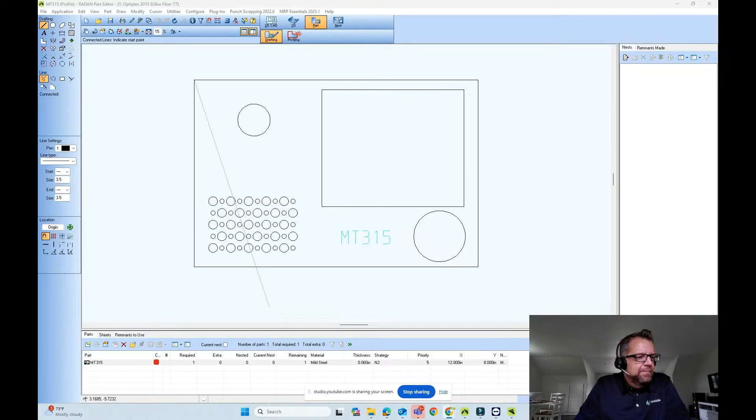I'm going to switch here to profiling, then I'm going to click on settings, and that should pop up this box here. What I want to draw our attention to first is that we're going to be looking at mild steel 060 with nitrogen.

Now this is important because this drills down into the manufacturing database where all this stuff is saved. Everything in this window, all the edits and changes that we make, we can come over here to settings and save that to our manufacturing database for this material. Now that's important because when we click on the next thing, I'll show you how you'll notice if that's incorrect, if you're used to working with strategies.

Now some posts, if you don't - I'm on a Mazak today. So if you have an older machine or older post that may not need the use of strategies, it may be a little bit different. All you may have is just mild steel, or material type and thickness.

If I was to change this, and I'm going to remove my notification of the gas, right? I'm going to select none. I'll click OK and OK again. Now in my rules and styles, notice my page changes quite a bit.

So if you come into this and edit some stuff and you're like, wow, this looks weird, that would be probably your first indication that, okay, let's go back and look. Yep, I don't have a strategy. If you're using strategies, keep that in mind as well.

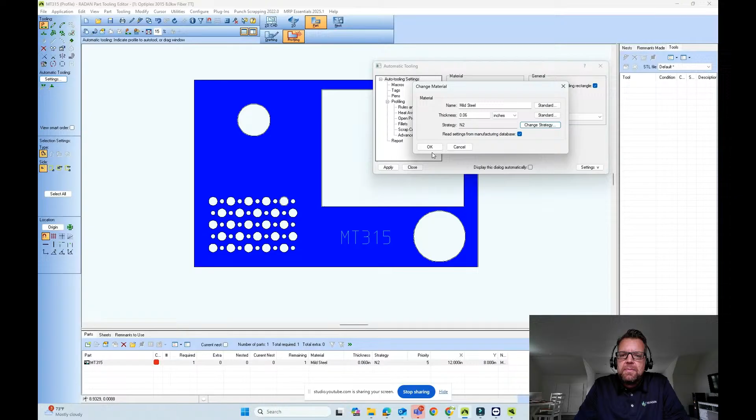So we're going to switch back to nitrogen, that's our default for this material. And then we're going to jump into rules and styles. This is like a hyperlink - when you click on edit, it jumps you to the page where the rules and styles are meant to be controlled, and we jump to small profiles because that's what it was selected for.

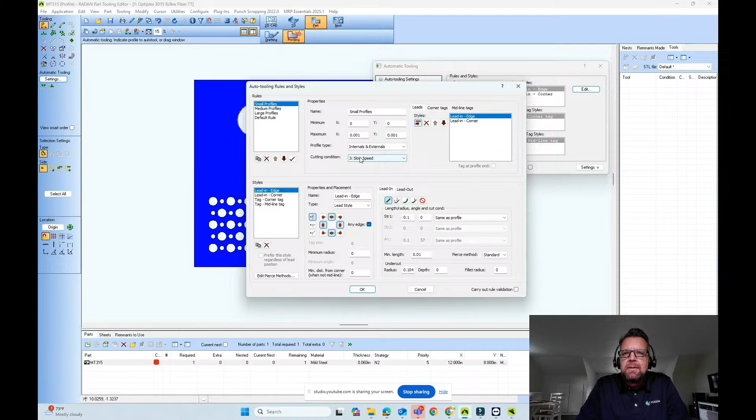Once you're in this, you can maneuver around and work on any of the rules or styles that you have. This, like I mentioned, is straight out of the Mazak handbook. If we installed a post, this is going to look exactly like how it would look for you. But I'm going to go ahead and just apply.

Okay, so we've got some tooling here in the background. If we zoom in on all of our holes, they're all in the same direction, all approximately the same length. Now the reason why I wanted to do that first is because when Mazak sets this up, they set it up so that everything is just done with large - basically zero to everything is done with the high speed, fast cutting.

We can control that by examining the features that you may have on your part. So we're going to do that today. We're going to say things up to quarter inch, I want to be done with my slow condition. So here's the conditions that you can choose.

If you aren't familiar with what conditions do, conditions are a way that we can control the machine. If there are different cutting conditions that reside on the controller, we can call them up and say this particular feature I want to do fast, this one I want to do slow, maybe some etching, maybe other options. All are controlled, in our case, by feature size.

Let's say my medium, I want to go up to 1/2 inch. Notice I'm not entering a bottom value. The reason is because this list works from top to bottom, so it's examining all the features on my part up to quarter inch. If they are a quarter or less, they're going to get my slow speed condition.

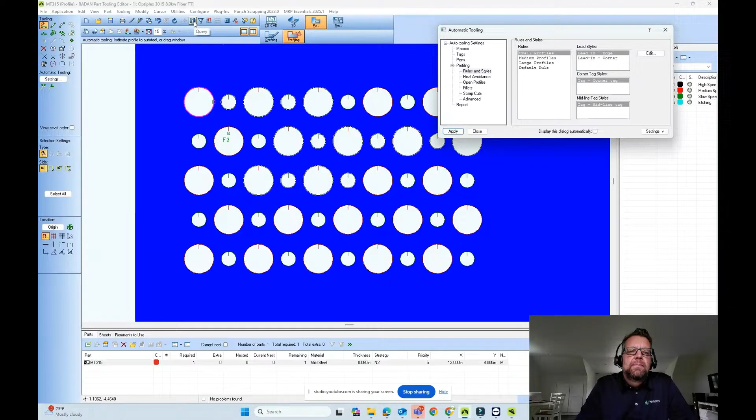Knowing that, if we come in here and say, okay, maybe if we go really small, you have a 16th, so now we're going to get that if it fits. Both of these should be a 0.06. If I measure that again, we'll go to the small one this time. We got 0.06. We'll go to the big one, 0.06. So if it has the room to make it fit, you'll get your desired length. If it's too large and that safety mechanism pulls in, you're just going to get what will fit, coming back to that center point.

So if we switch to double straight, this works like a countdown. I'll keep my tiny little lead-in as my approach coming up to my part, and then maybe we'll have another, maybe a little longer lead-in coming to it. I'm also going to have that come in at an angle just so we can see the difference.

The last thing is I'm going to have it be a different condition. In here we're cutting with condition, our fast and our slow and our medium condition. Here I'm going to just push everything to be high just so we can see what will happen. This is probably not what you'd do in real life, but just to see the different colors.

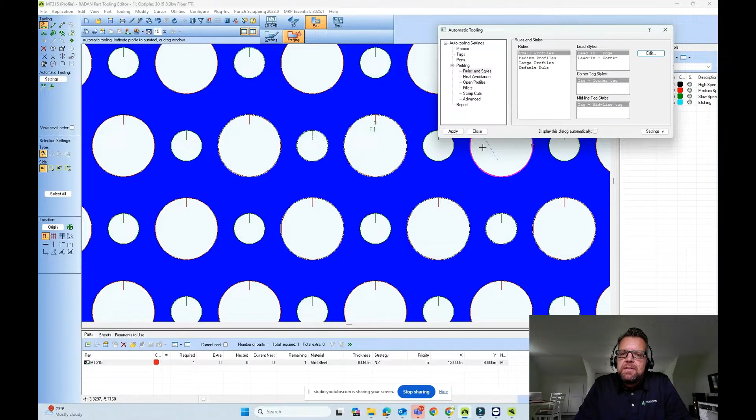Now if we zoom in even a little bit closer, we'll notice that we've got it piercing, coming in at an angle, changing to condition 3. The whole reason for lead-ins is to establish a good cut prior to it getting to the actual feature we want cut. This gives us a little bit of extra length, whatever condition we chose, into the part itself.

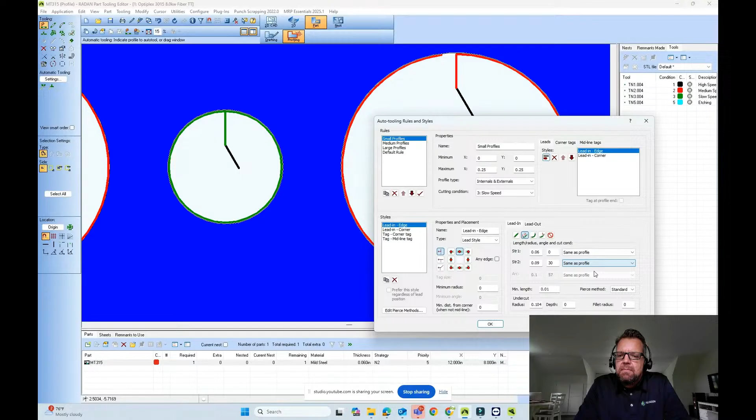We'll edit that once more, and maybe this time we'll just make it all the same. So we should see greens and reds and solids. Hopefully that makes sense to you guys.

Now, I didn't explain what's happening here as far as the degrees that well, but when we switch to arcs, this column now changes from angle to degrees. So with an arc, we've got a 0.1 lead-in coming in at 57 degrees. We'll apply this and see what we actually get.

So it didn't fit on this one, for maybe a couple of reasons. Maybe our lead-in length is too long, or maybe our angle or our degrees aren't enough. We can only come back to 180, so we can make a semicircle.

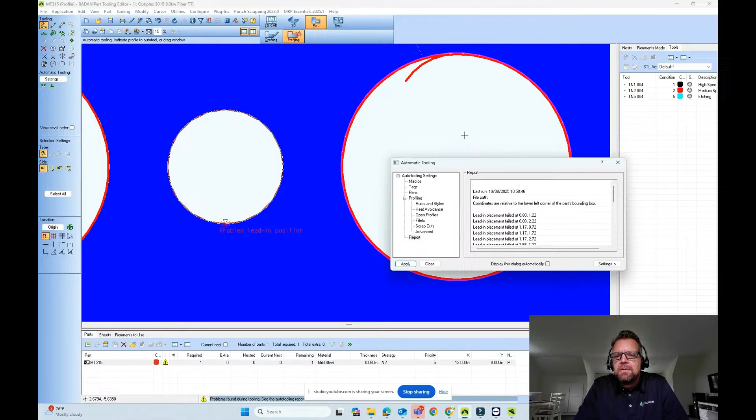We'll edit this again, we'll come back to 180. I think we should have enough room at 0.1, should be able to fit inside this completely. So there, we can only do a 180 all the way back. So there again, we didn't get it here. I think it's because the size is too big for our angle return.

So let's go, we're gonna go 30. I don't think that's true. I think it's this: our arc is too large for our feature size, because arc would be a 0.2, and our hole isn't 0.2 big. I think it's a 3/16 hole.

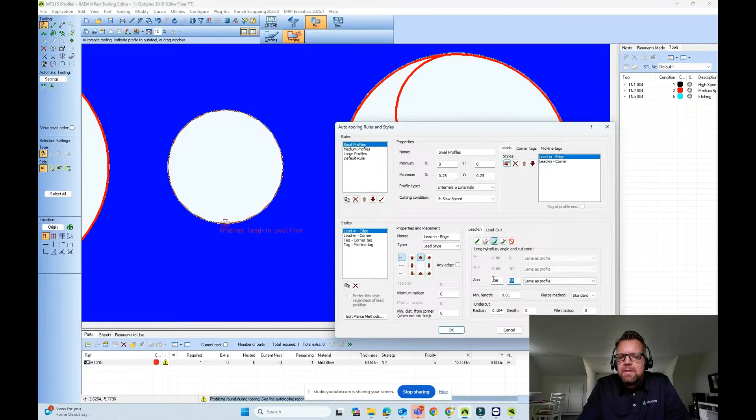So let's make our arc back at a 16th, and we'll arc it back 60 degrees. It should work on both, and it does. Okay, so that's kind of how we would work with arcs.

And then the last one is an arc with a straight tail. We'll just apply this and see if we have room for that. So we've got the tail coming into an arc into our feature. And that's kind of how we would set that up.

One thing that I want to kind of close with, and we're kind of keeping this a fluid thing—there's so many things we can talk about in auto tooling—but I kind of just wanted to highlight today rules and styles. Once we've set that this is what we want to have, then we need to go in here to save our settings to the manufacturing database.

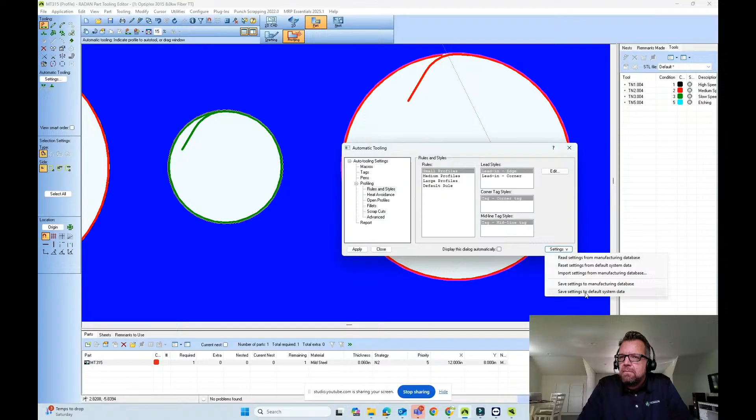Let's say we've come in here and we've made a mess of it, right? Everything that we've done, we lost control of how to get it back. We made too many edits. We don't remember all the edits we made, but it's not working.

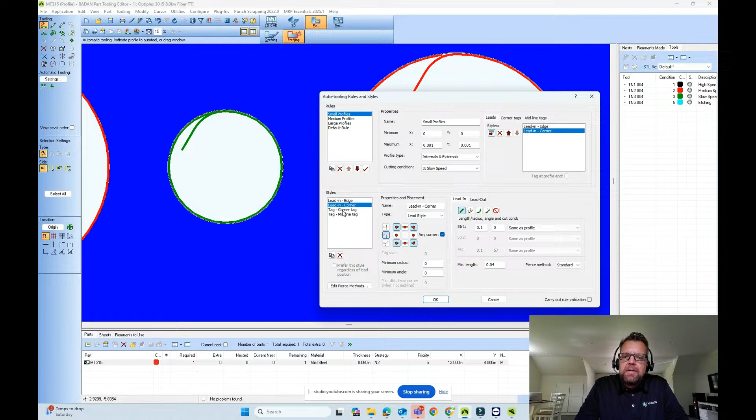So if we come in here, instead of saving it to the manufacturing database, we can read it from the manufacturing database if it existed before. So that's what I'll do—I'll say reset, basically. Now we come in here to edits and we've lost basically all the edits that we've done. Notice now it's all back to 0.001. None of the cool stuff that we did down here, it's all gone. It's reset. That's exactly what we wanted to do.

And if we reapply, we get them all coming from the side again.

Okay, that's going to wrap it up for today. Next week, we're going to tackle why we're getting tabs here, that'll be one of the things we address, as well as pens. So next week is going to be an exciting adventure again, talking about—instead of just examining it by feature size, we've seen color we're forcing, but if we have color on our parts, that'll do something different than what we can force it with. And tabs, tags, micro joints, etc.